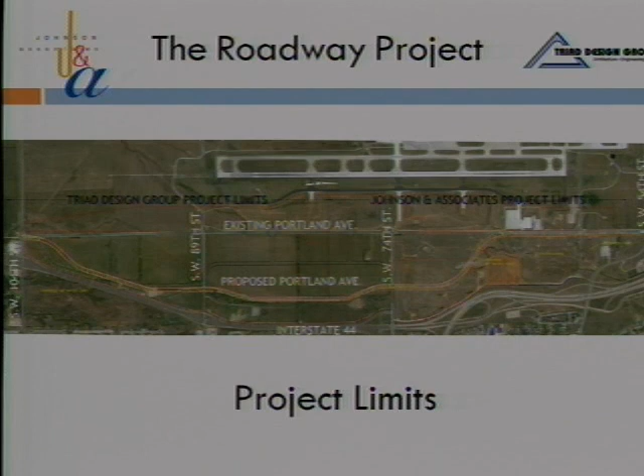It's our intent, and we've worked very closely together, to submit these final plans as a unit, and they would advertise and bid separately but go in conjunction, so the project would be built either in tandem or back-to-back. There's a portion of the historic Portland Avenue that will remain in play to allow for access to some of the taxiway development.

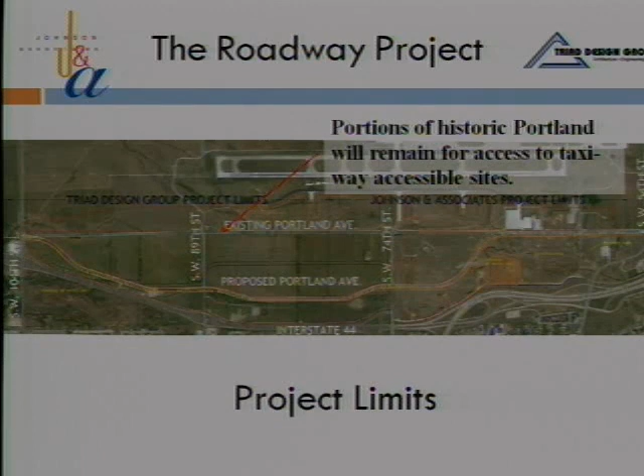Those warehouses would allow for air traffic to gain access to the taxiways. The south portion that Triad has includes the intersection at 104th Street and the intersection at 89th Street, as well as the connection from 89th Street to I-44.

The north portion includes 74th Street and the connection to the already improved 54th Street intersection.

The midsection is what we're calling the median section. This is the portion of the project that was proposed to include a median typical section for the paving, allowing for a 20-foot island, and I'll show you more details on that in a minute. This also includes the horseshoe road that will provide internal circulation in the future as this development continues to grow forward.

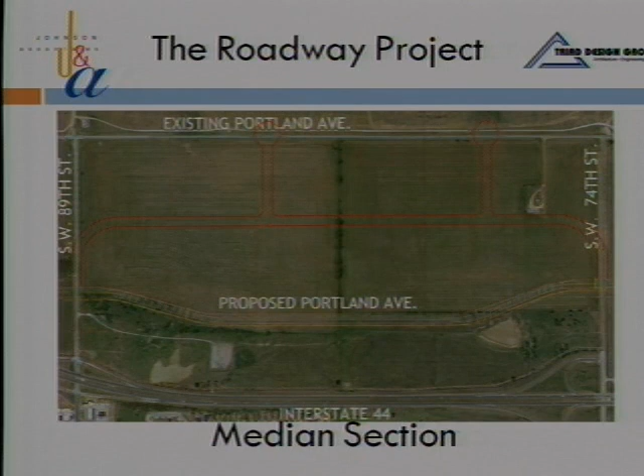Developing the spine of Portland Avenue, there was a lot of things that we needed to look at, and included in our design contract was the need to look at all the grades and the drainage. A master drainage plan was conceived and is in process.

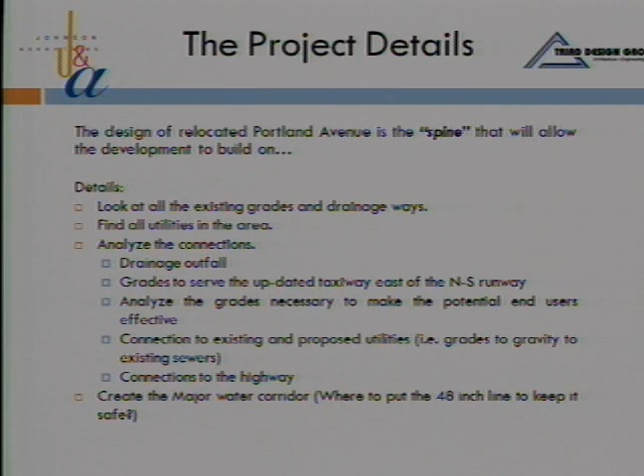That area includes what's blocked out here, showing a master grading area. What we have prepared will be a map for future development to use as they develop these tracts. This is not a flat piece of land, so it takes some forethought with regard to what grades are going to be used, what can access the taxiways, and what will access the new Portland alignment.

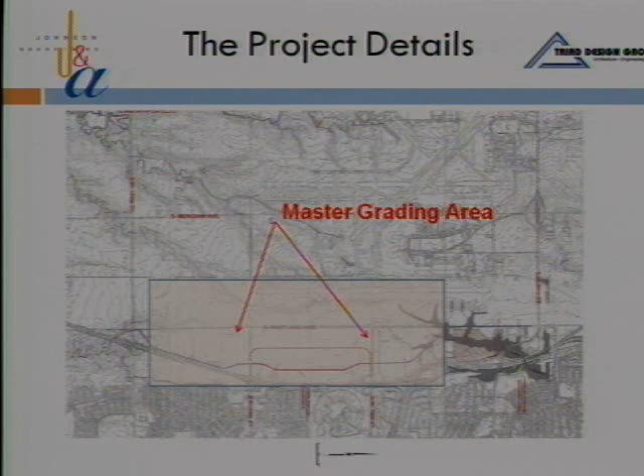This is an example of how we're setting it up. This is the master grading plan, just overall conceptual. You can see the building sizes vary, and we use this to set finished floor grades and anticipate what the overall grading project will look like.

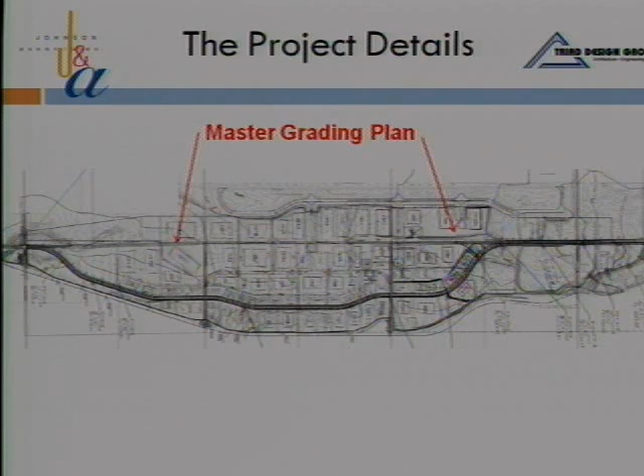Under the roadway project, we are only doing the dirt work for the roadway and some drainage improvements. The rest of the grading on the 1,000 acres, plus or minus, will be done as the development occurs. But this will be the grading map that they'll use. Same way with the drainage.

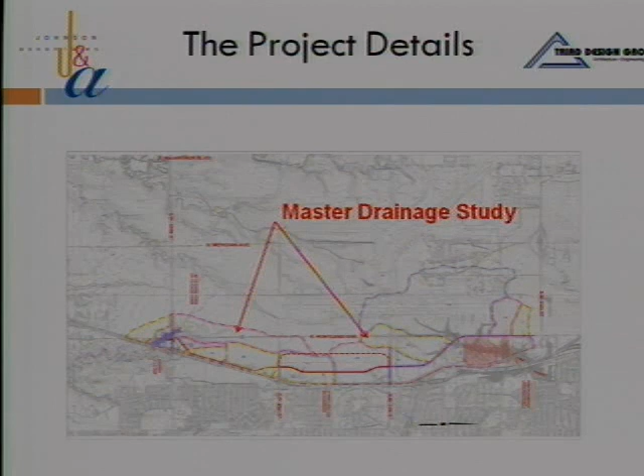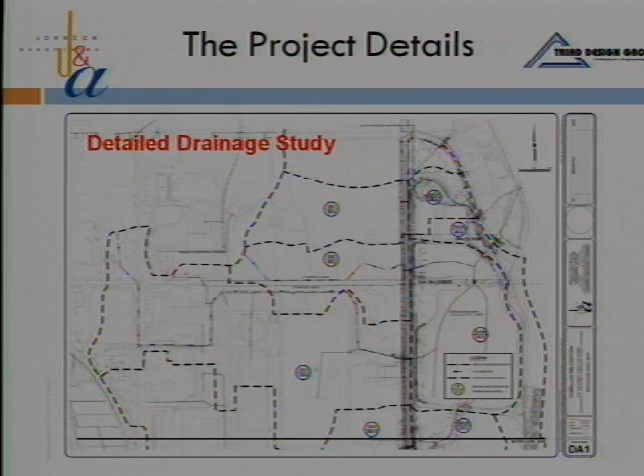In order to make sure that the street is designed to adequately contain all the stormwater runoff, we've looked at a master drainage plan that includes the very large drainage basins that drain over to I-44 to the east, and then we have designed the structures under the new Portland Road and the inlets on Portland that will allow for those developments to occur and drain onto the streets. This is just an example of the amount of detail we've had to do on a drainage plan to incorporate the sizing of the inlets and everything on Portland Avenue.

As we considered the drainage condition, we have drainage outfall issues. I-44 serves as like a dam. The structures under the highway are not necessarily all adequately sized. They were designed many, many years ago as part of the interstate. So as part of that, we've had to look at the backwater conditions and how that affects our intersections of 104th, 74th, and 54th, all of which will have major storm sewer structures that will take the runoff from the airport east towards the highway.

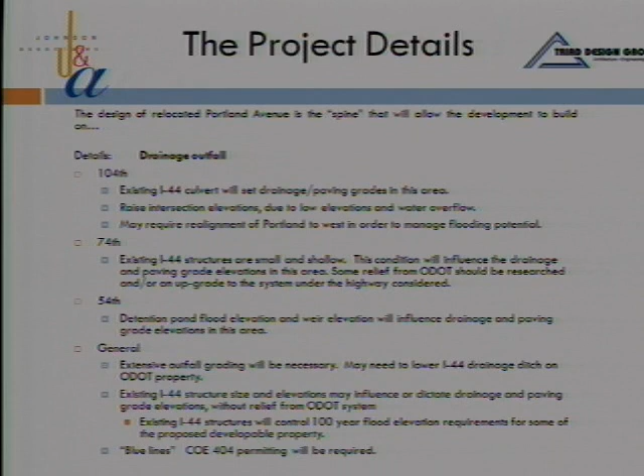The roadway elevation has been established such that any backwater that occurs from the undersized structures under I-44 will not adversely impact Portland. Also along this way, there were 3 locations where the Corps of Engineers had jurisdiction. It's called a blue line on the Corps' maps, and we have already applied and received nationwide permits to allow us to do the work that we're proposing through the Corps of Engineers.

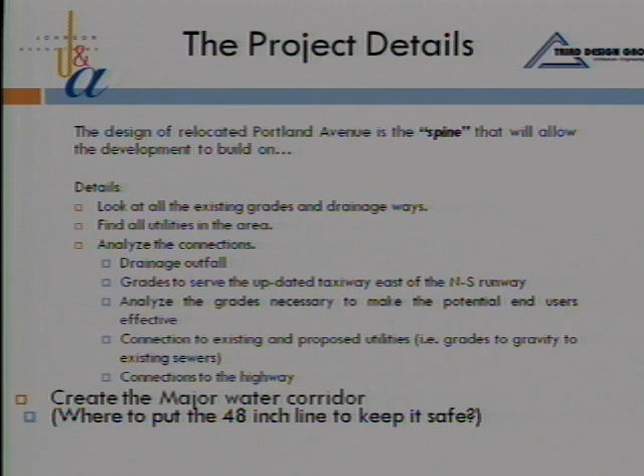Additionally, as I mentioned early on, is the second part of this. We had to do all this preliminary work for grading and the roadway and storm sewer so that we could design the water line, which is really the front project of the 2 projects.

The water line is an extension of the 48 that Oklahoma City has been bringing from Draper Plant west to serve those areas in western Oklahoma City that have suffered with low pressure, especially during the drought and the high volume usage this summer. This will go through a new pump station located at 104th Street, and the main, as part of our project, will extend all the way to 54th Street, and then ultimately, in a future project, go west to Rockwell, and then on from there to the western parts of the city.

These 2 projects, 0504 and 0505, those preliminary reports have been approved by the Water Trust and the Council. The final plans have been prepared, and they're ready to go forward, but we're waiting on the environmental study that's done as part of this Portland project. We spoke with the water utility staff, and we're going to hold those plans at bay until the environmental study is released before we go advertise it, so it'll probably be after the first of the year.

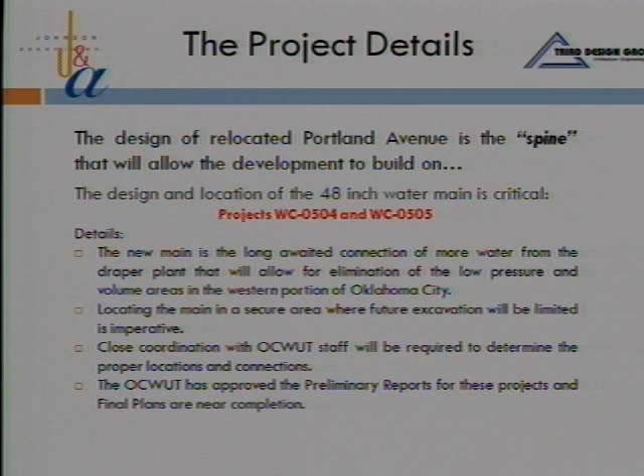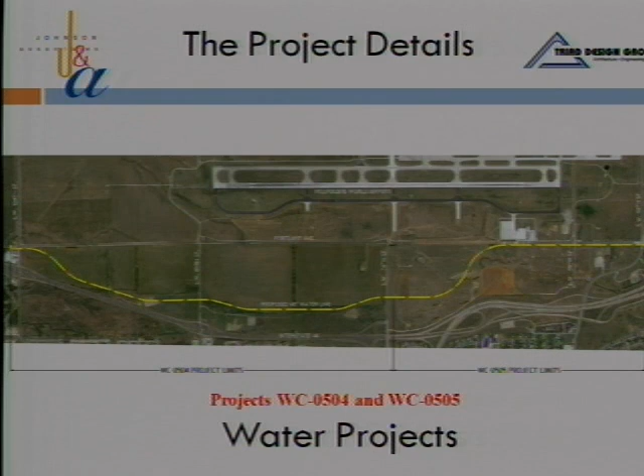Just briefly on the water projects, the alignment is, as you see in the yellow, basically follows the east side of the proposed Portland Street. Additionally, on the Portland alignment, there's a MAPS Trails project that is projected to be along that eastern side as well, and we think that that's a good location for that. There'll be plenty of right-of-way and easements granted as part of this project.

Signalization will be provided at 104th Street as part of the Portland Design Project. The rest of the intersections, until development occurs, will just be 4-way stops. And of course, there's a signal at 54th Street already, and that'll remain.

The easements that are before you today are a 120-foot wide roadway easement for the street and utility improvements, and then a specific 30-foot water line easement that'll house the 48-inch line. That's before you today in 2 pieces: the piece along the east side of Portland Avenue, and then the second piece that runs east and west from Portland to Rockwell.

Other utilities on the site have been addressed. We've had actual on-site locations done of the many oil field lines that run across the airport property, allowing us to do as much value engineering up front, so there will be very little changes as part of the design construction.

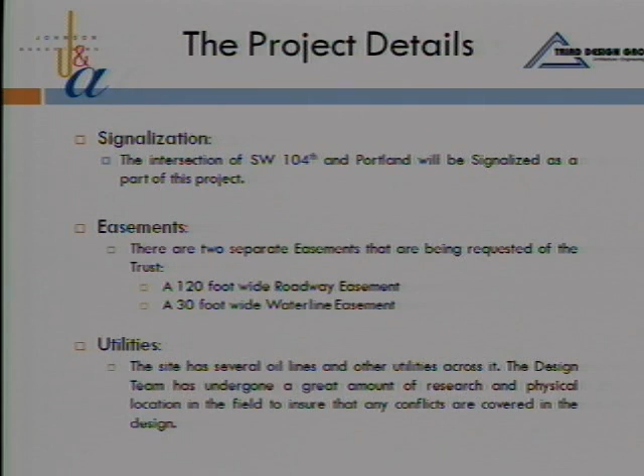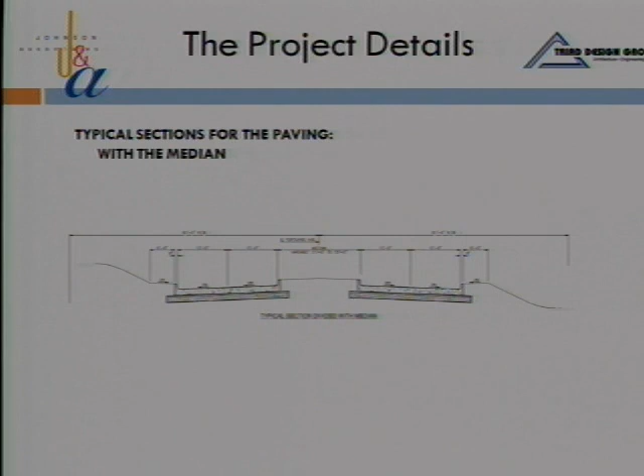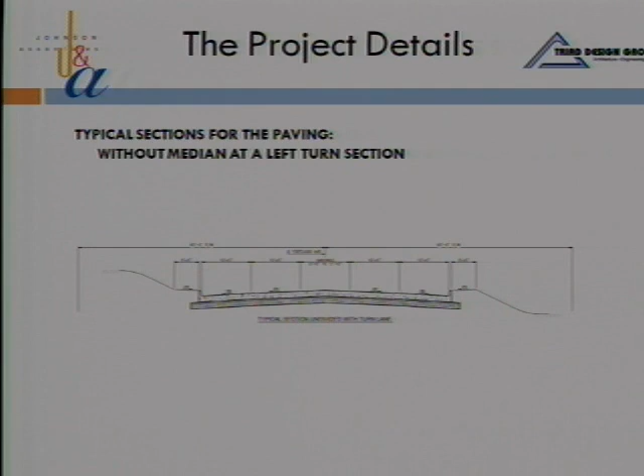The non-median sections, this is a typical that shows a standard left turn bay that would be included at any other of the intersections.

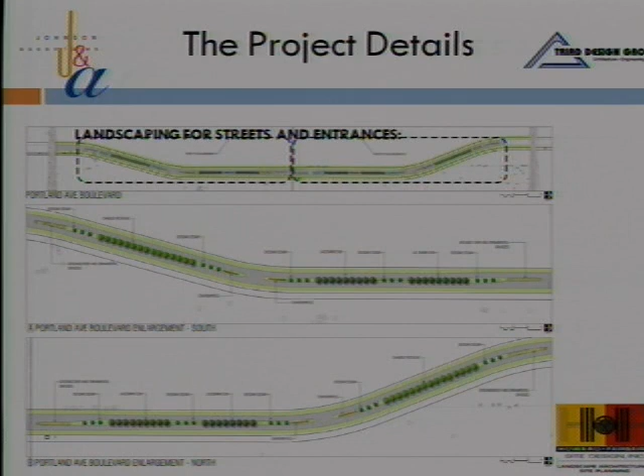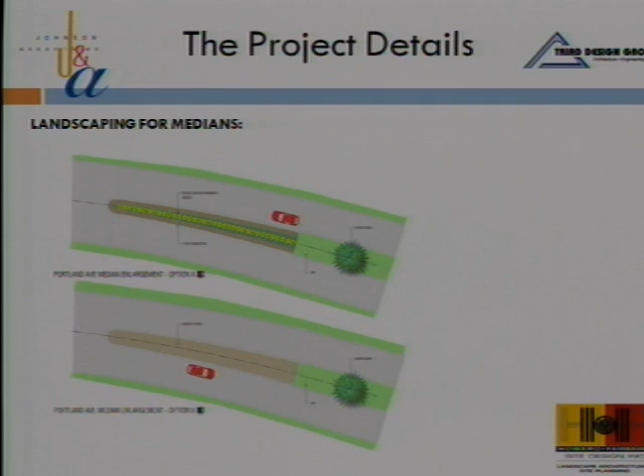We've prepared for your review what the landscaping portion of this project will be. It'll be median landscape only, with some detailed landscaping at the noses of the turnarounds, shown in detail here, including hardscape and shrubs. We're working closely with the airport's landscape people to make sure we have plant types usable on airport property that won't attract birds, ducks, geese, or other animals we don't like.

In summary, the schedule: the water line goes first. It's funded through the OCWUT CIP and scheduled to go out to bid early next year. The roadway plans will follow, but funding for that won't be until 2013, though the roadway plans will be significantly complete and ready to advertise whenever funds are available. Cost estimates: the water line is $8 million, and the roadway is $11 million. We anticipate staying within those budgets. Funding for the two projects is OCWUT CIP for the water, and 2007 general obligation bonds, as well as Airport Trust funds for the roadway.

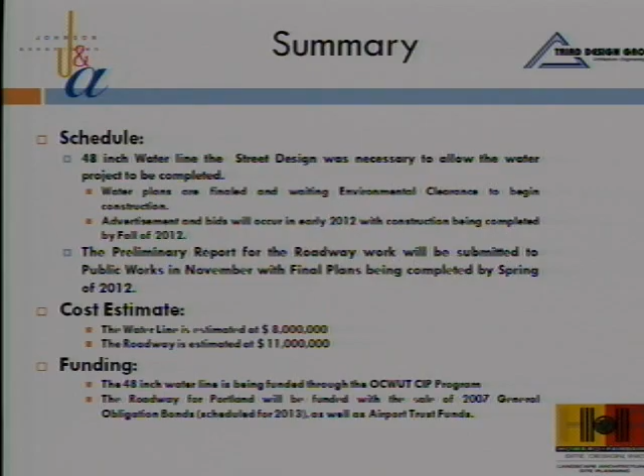With that, I'd be happy to answer any questions you might have. Thank you so much for coming, it's a great project, and we're eager to see it move forward.

So, Tim, you don't like ducks? You don't like ducks? I love ducks, but not on there.

Thank you. This is a very important project, and we're under a 30-day comment period for the environmental assessment. We hope to have a finding of no significant impact from the FAA by the end of the year, so we can get moving and bid these projects, particularly the waterline project.

The second presentation I have for you this morning has to do with the brand naming and logo we've been working on for some time for this East Side Development project. I'd like to ask our Public Information and Marketing Manager, Karen Carney, to come forward, set this up, and introduce our guest who will do a presentation. Karen?

Thank you, Mark. Good to see you, Chairman, trustees. I know everybody in this room is really excited that we are finally moving forward on the East Side Development, which we've been calling it that for some time. We finally decided it was the appropriate time to move away from calling it the East Side Development. We tried to take this task in-house initially.

We all had a lot of different names that we came up with and quickly realized we were not very qualified to do that. So we tasked Funnel Design Group, the design agency on contract with the trust, to take this on. Not only are they qualified because they're intimately knowledgeable of the airport from their past work with us, but also because they really know what's going on in the community. They've done work for downtown Oklahoma City, Automobile Alley, and a myriad number of clients, so they're very familiar with the direction of the city and where we're going. We felt they could really do a good job for us.